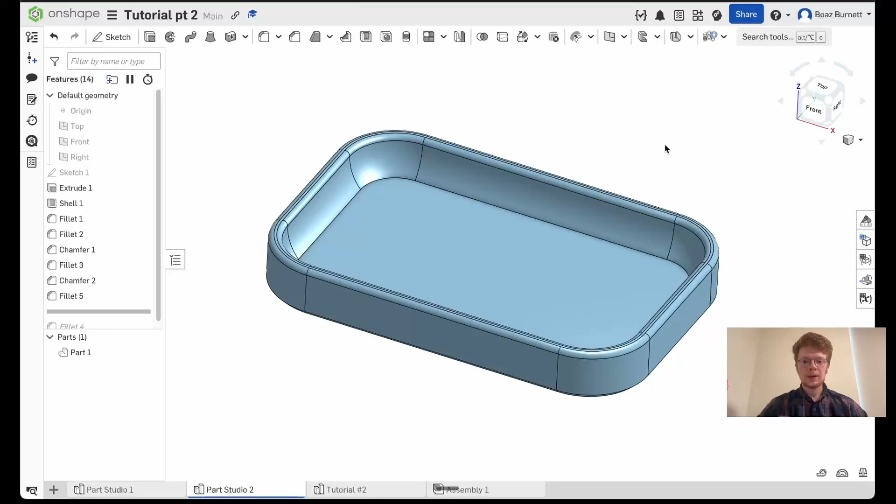Today we're going to be continuing my tutorial series on Onshape, showing you how to create this simple but I'd say nicely designed catch-all tray. To start, go to onshape.com, link in the description, and open up a new part studio. I have it named tutorial number 2, but you can name it whatever you like.

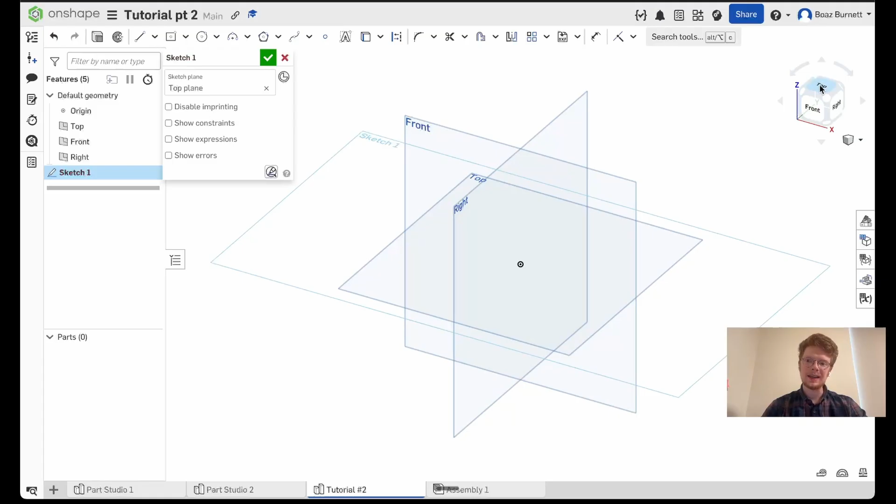Once you're there, just press the sketch button here and select a sketch plane. I'm going to select the top one. Then press the top button in the top right, or press the N key on your keyboard to focus down on it.

What you're going to notice here is that there's an origin point right here in the middle, and it's very important to use this in order to actually define what you're drawing.

For instance, if you have a center point rectangle, which may be hidden underneath this drop-down, and you just draw it out and define one and then two sides, it's going to still have blue lines, meaning it's undefined. If I turn off the dimension tool and drag it, you can see I can still move it around. That's because it's not properly attached to the center point.

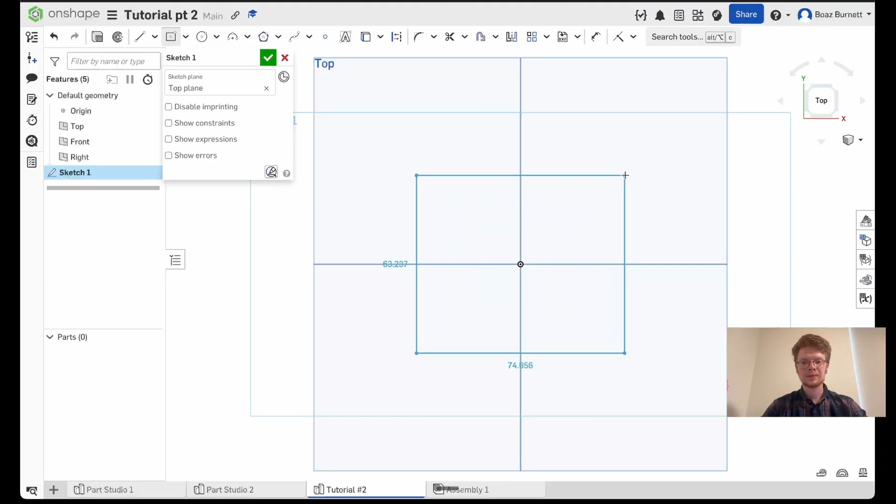But if I delete all of this and create a new center point rectangle based on this center point, once I've defined both the length of the top line and the side line, it's going to have all black lines, meaning it's fully defined, and I can't drag it around. Turning off the dimension tool and trying to drag it, nothing happens because it's fully defined.

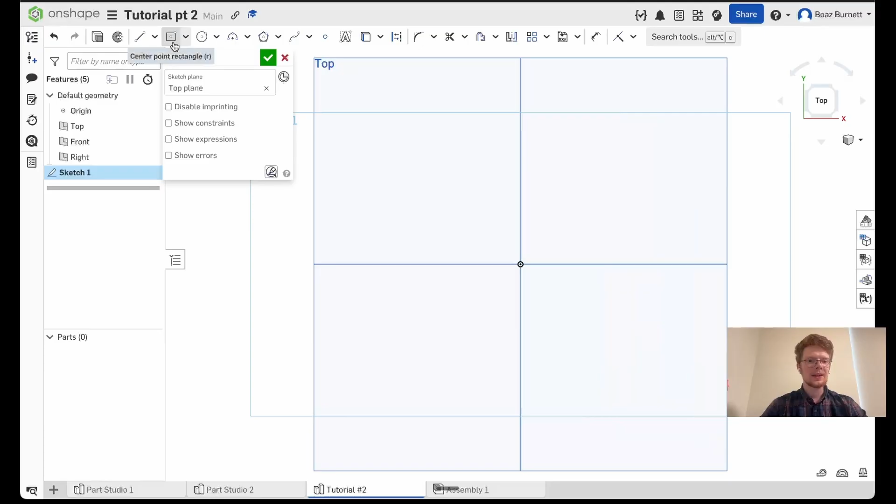With that said, let's get started. I will once again push the center point rectangle button, possibly hidden below this drop-down menu. Click on the origin point, and then drag out.

I'm designing this so that it works on most 3D printers, including the A1 Mini. So I'm going to define it as 6 inches on the long side and 4 inches on the shorter side here on the right. You can go to the dimension tool either by typing the D button, clicking on this button, or searching for it in tools, and then pressing enter. Then I'm going to click first on the top line here.

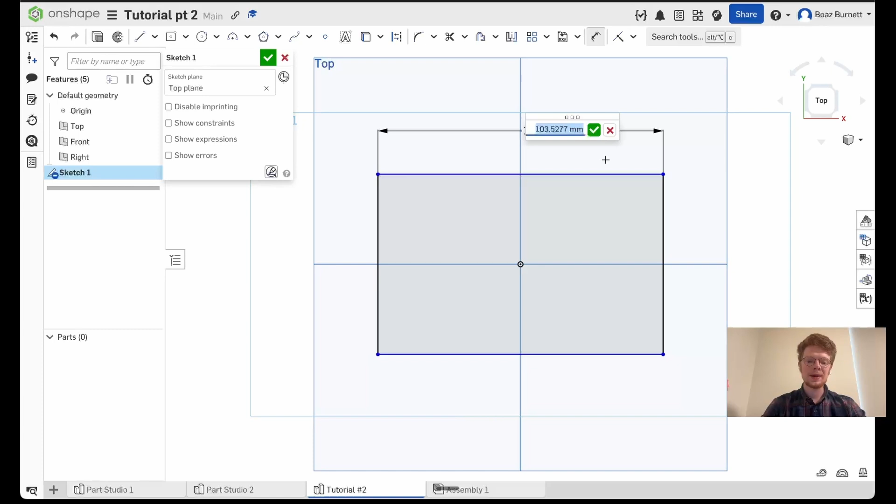Dragging out, you can see that I have my dimensions inside of millimeters currently. But if you click on it, you can still type in 6 and then IN for inches. Pressing enter, it's going to define that as 6 inches.

Mine is showing inside millimeters. Then if you click the right line here and drag out, you should be able to define this as 4 inches by just typing in 4 IN and then pressing enter.

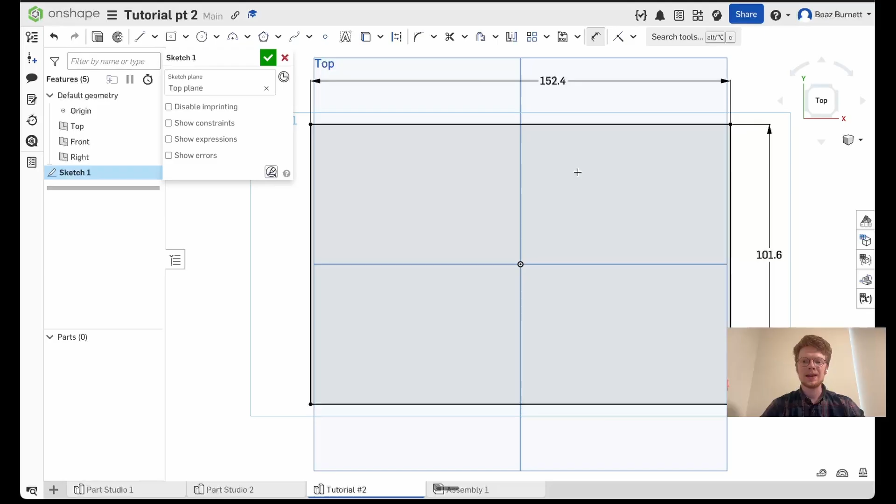With all of that done, the next step is going to be to actually extrude the shape out so it goes from a 2D plane to a 3D object. To do this, we're going to either go to the top left button where it says extrude, or search for it inside the tools menu. I'll click this now, and it should be automatically selected, but if it's not, you can just click on this drawing.

For the distance, I'm going to go with just over 3/4 of an inch, which is 20 millimeters. Type in 20 and then MM to make sure you have the units, and then press enter.

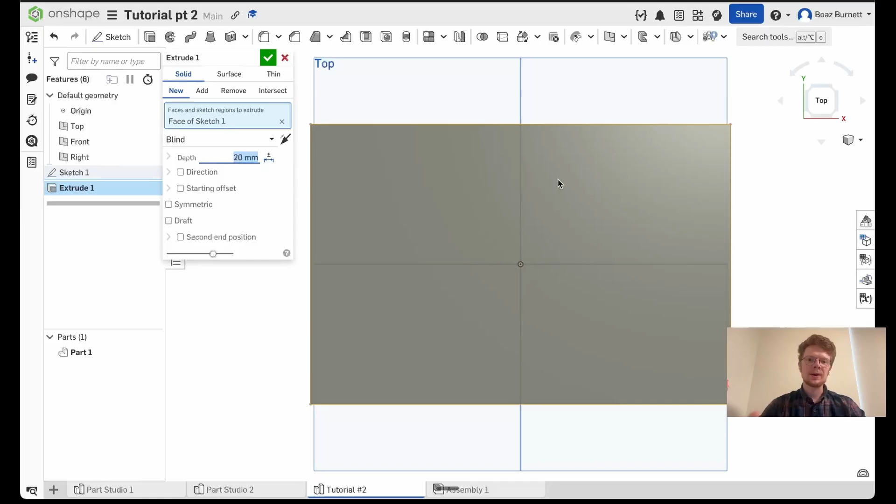Using 2 fingers on my trackpad, or you can use the right click button on your mouse, I can then drag that out to get a preview of how far out this box is going to go. That looks good to me, so I'm going to push the green check mark, and we now have a 3D object.

If you are on a MacBook, you can press the Control key and then 2-finger click or right click button to pan around. Or if you're using a mouse, you can simply press in the middle mouse button, which is generally the scroll wheel, in order to pan the object around your environment.

The next step is going to be actually taking this block and making a hole inside of it so it can hold stuff for us. We did something similar inside of the previous video where we basically extruded a circle and then used a tool to just cut out the space inside of it. But there is a better way that's a little bit faster.

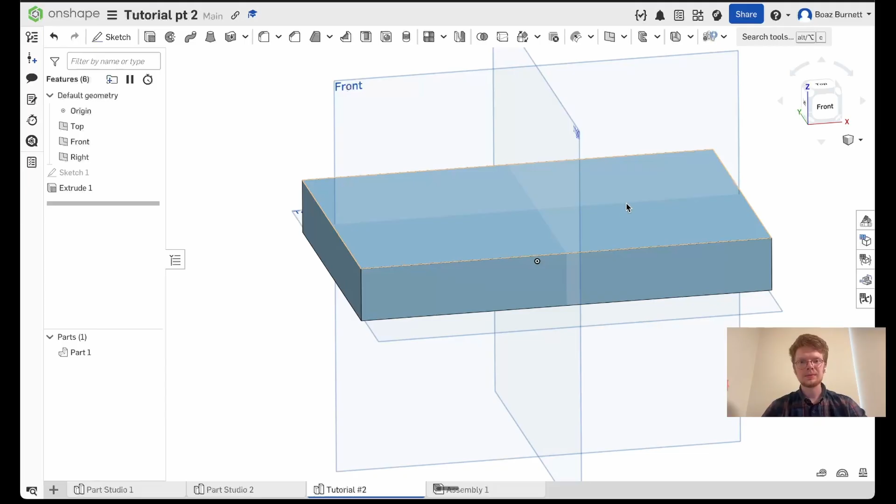It's called the shell tool. You can find it with this icon here inside the top menu bar, or you can just type in shell here on the top left, top right.

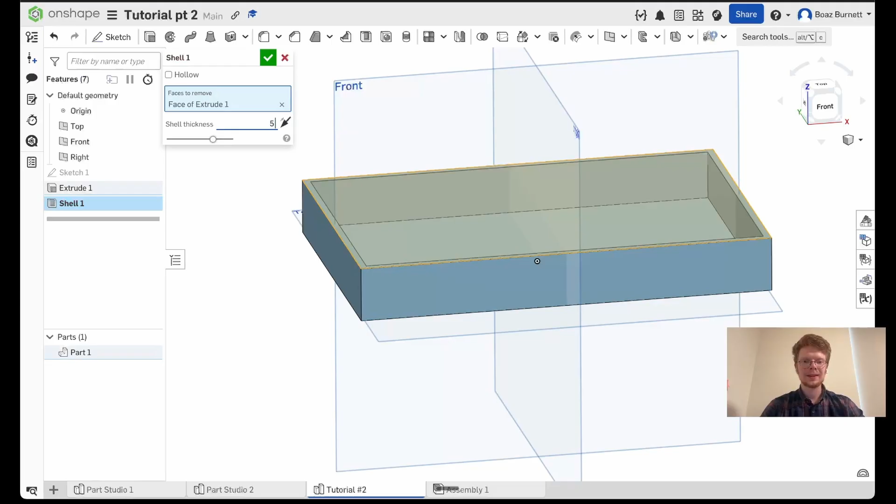Press enter, and it's asking you to choose a face to remove. I'm going to choose this face here. For the shell thickness, I'm going to choose 5 millimeters, so 5 space mm for millimeters. Press enter.

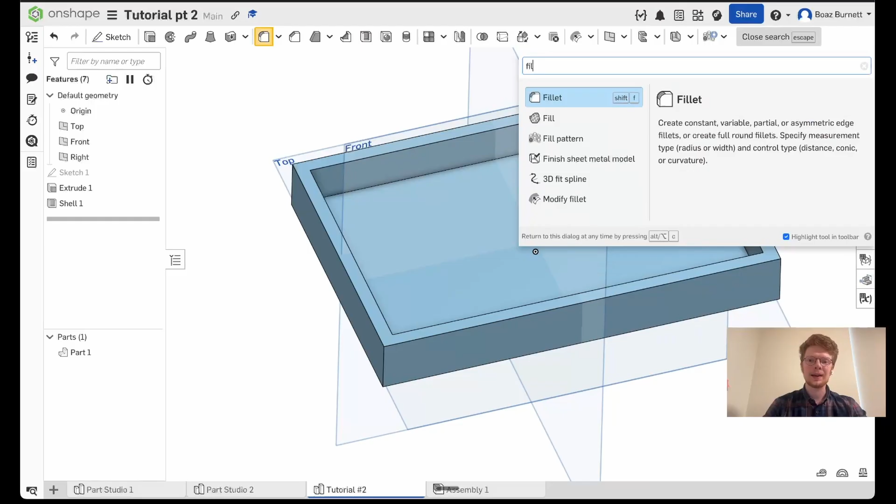Now that you have your box with 5 millimeter walls all the way around, the next step is to get it looking a little more curved, which I think is more pleasant to the eye. To do that, we're going to use a new tool called the Fillet tool. You can use Shift plus F, click here inside the top menu bar, or just type in Fillet, which I'll do now. Pressing enter brings you to this menu on the left, where it's asking you to choose the entities you want to fillet.

We're going to start by curving out this general square shape on the inside, with a radius of 20 millimeters, and the rest of the settings are going to stay the same. To start, I'm going to choose this line right here between the long wall and the short wall on the inside.

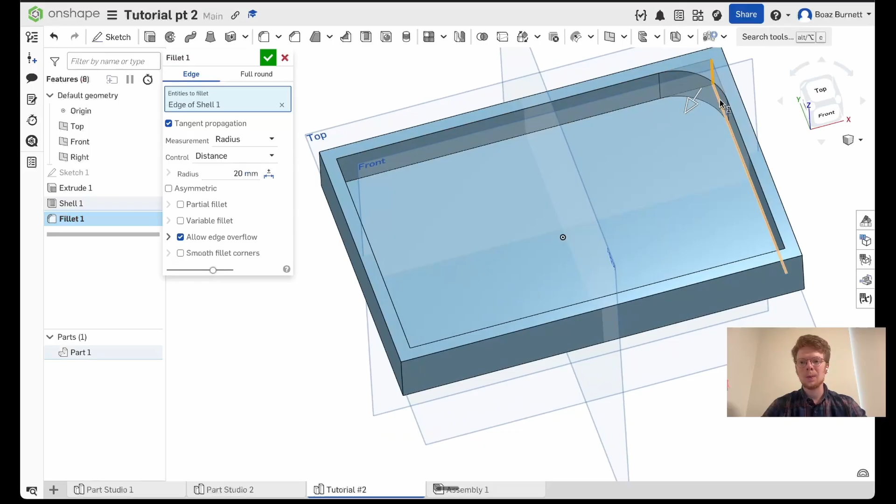As you can see, it previews showing you what the wall is going to look like after applying this fillet, and that looks good to me. So I'm going to go ahead and start selecting the other corner lines on this object.

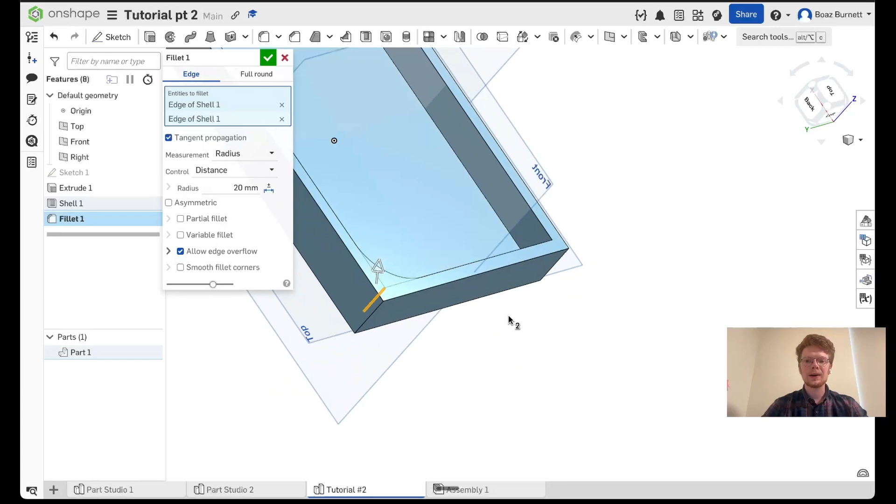Using the right-click button or two fingers on your trackpad, you can rotate the object. I'm going to click this one next, then rotate it all the way around. I'm going to click on this one, pan it over a little bit, and then click on this one here.

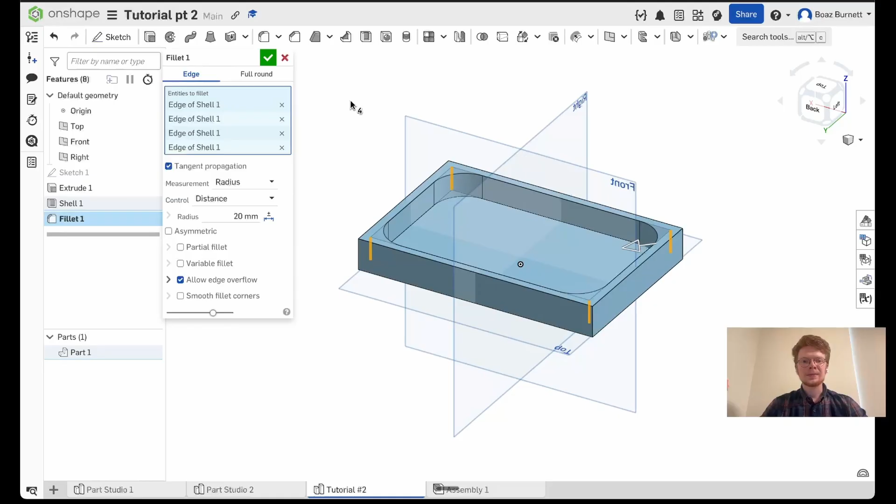If you need to, you can also use the cube here to move your object around, which can make it easier to find some of these edges. You can just click on the corners here to get that view that I'm looking at now. Once you're happy with everything, push the green check mark here, and you're able to move on to the next step, which is rounding out these outside corners right here.

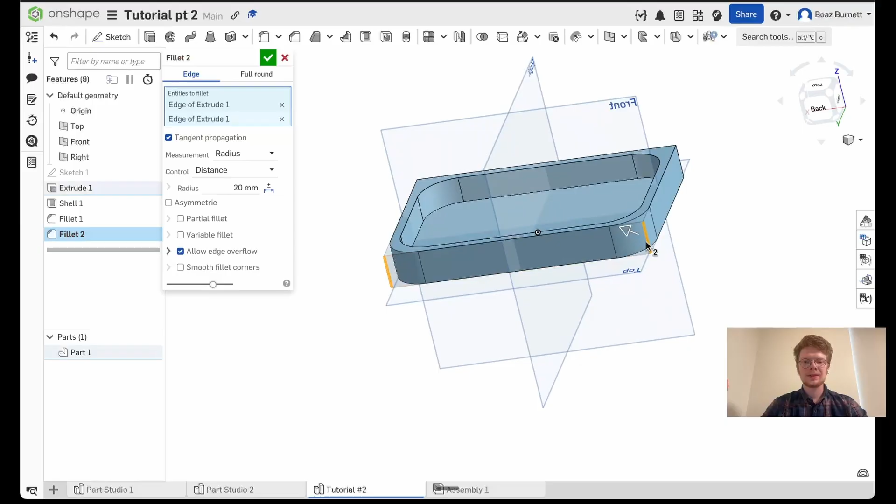To do that, you're going to go back into the fillet tool, and select these outside corner lines. So selecting this here, here, here, and here.

I'm going to take a look at this from the top view, and I'm noticing something I don't really like. The line thickness between this inner wall and the outer wall, and the line thickness between the corner inner wall and corner outer wall, don't really line up. I think it'd be more aesthetically pleasing if it was closer, so I'm going to try changing the radius from 20 millimeters to 25.

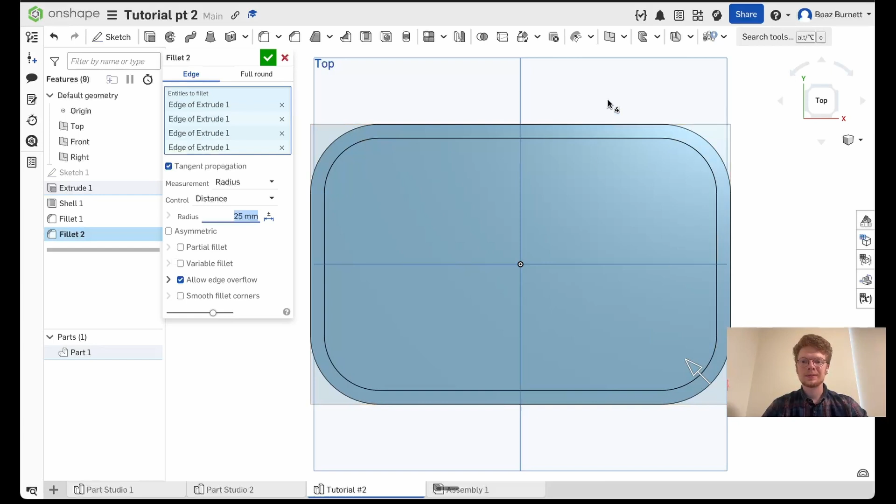Sometimes it's best to press Tab in order to make it actually calculate it. If you press Enter now, that also works. As you can see, the inner corner and the outer corner are now much closer in wall thickness to the rest of the design here, which I like. You can press the green check mark now, and that's really starting to come together.

The next step is applying a new tool called a chamfer. What a chamfer does is it basically takes a 45-degree angle off of the bottom of your part, or wherever you're applying it. I find this useful for a lot of different things, but one of the most useful aspects is that when you're printing an object, you won't have an issue with the first layer kind of squishing out.

If you're using a Bambu Lab machine, I found that they're generally pretty reliable at having a clean first layer. But on older machines, and even sometimes on Bambus depending on how it's tuned, you can still have issues where that first layer sticks out a little bit farther than it should. Using a chamfer on that bottom edge can fix it by bringing those edges in a little bit.

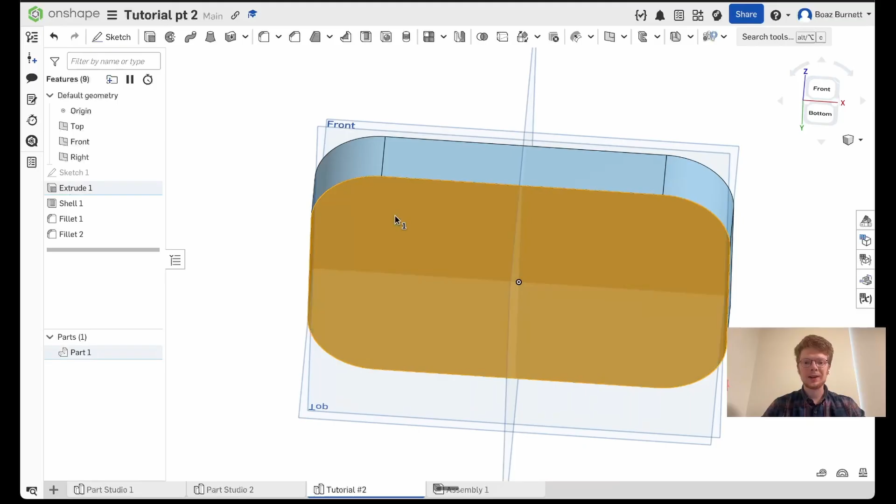We're going to try that now by flipping the object over using two fingers on the trackpad or the right mouse button, and selecting this bottom face. You press the chamfer button, which you can also search for in tools here. As you can see, it defaults to 5 millimeters for that chamfer.

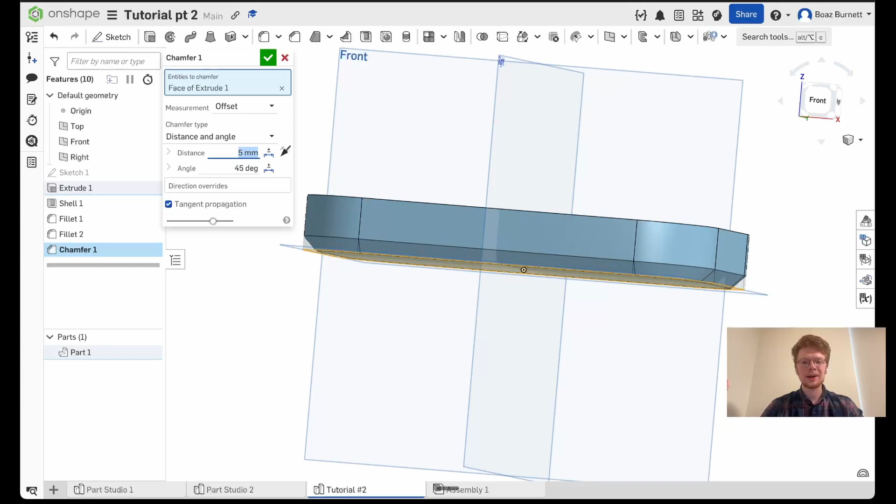I think that looks pretty good, so I'm going to just go ahead and stick with that. But if you want to, you can adjust that down to 2 millimeters or whatever other value. I'm going to leave it at 5 for now, and then push that green check mark here.

So it's starting to look pretty good, but let's look at the inside of this as well. I'm going to apply a chamfer here because it's going to help with the transition between the bottom and the top of this design. It will also help if you throw your keys or something in there, where it's going to kind of settle into the middle, which is generally what I'd want for a catch-all tray.

So what I'm going to do is just click on the chamfer button again, and then start going around the inside of this design. So just click right here.

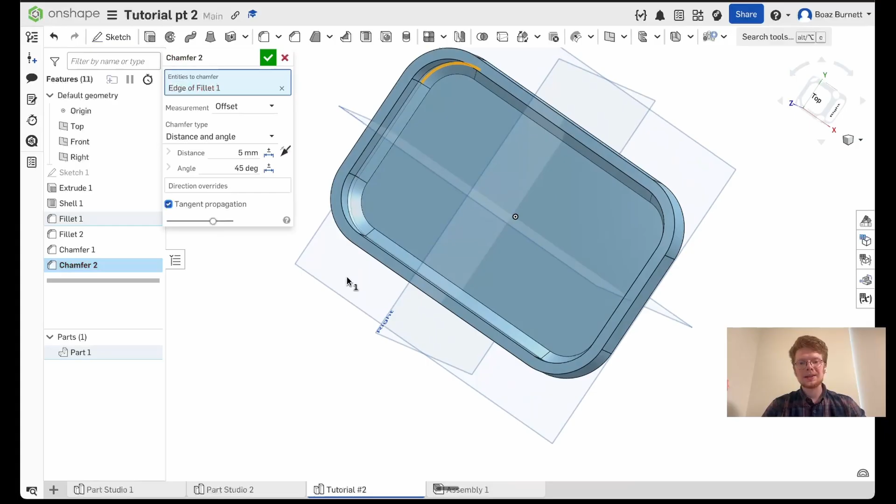With tangent propagation turned on, it goes all the way around from just clicking that one section because it's a continuous circular path. If you turn that off, it will just do that one section - it's actually giving us an error right now. I generally just leave that on, and it works for most use cases. If you're happy with that design, just press the green check mark here. We're starting to get a design that I'm really happy with.

The next step I would do is go and take the fillet tool one last time, selecting the top face here just to round it over. Sometimes on printed objects these edges can be a little sharp, especially if it's an object like this where you're planning on using it semi-regularly - you toss your keys in there, toss your wallet, whatever else when you come in through the door. It can be nice to soften that out just a little bit.

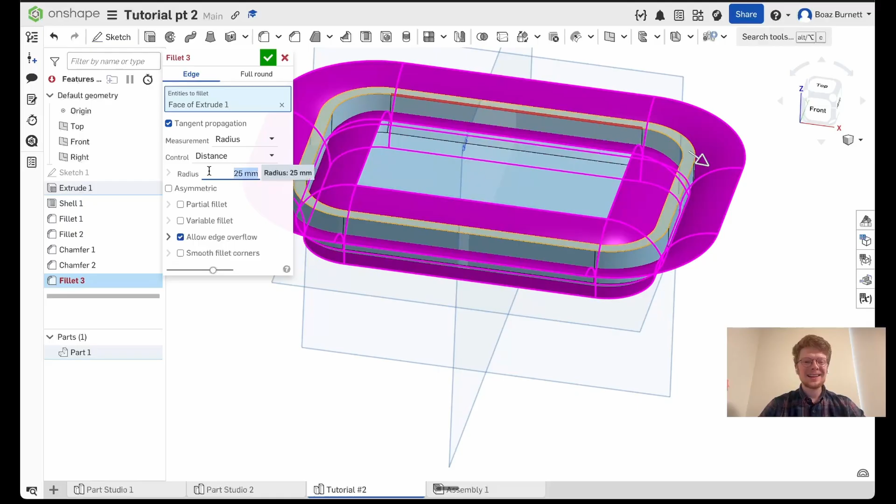I'm going to click on the top face here, and if it's left at 25 millimeters, it's complaining a lot. We're going to cut that down all the way to 2 millimeters and see what that looks like. And that looks pretty good. So we're going to go ahead and leave everything on and press the green check mark.

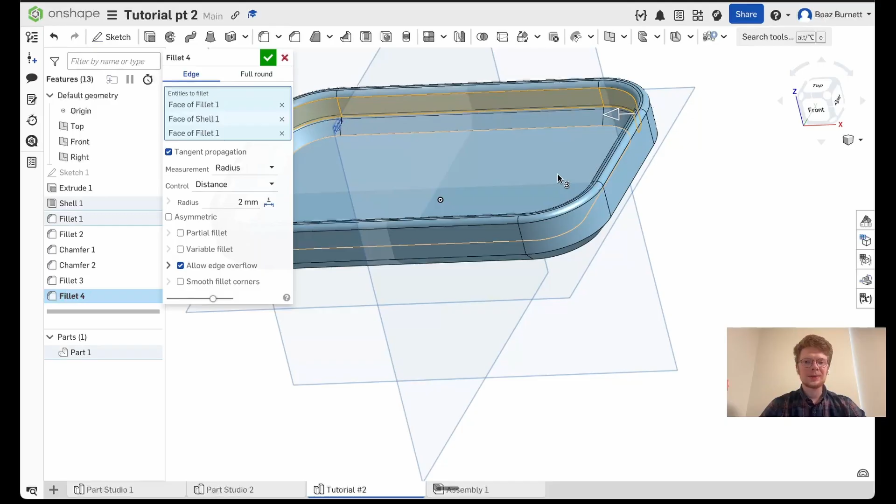So all in all, I think this is just about done, but I want to do one last thing to kind of take it over the edge. That is using the fillet tool one final time, going around all of these edges to bring it out just a little bit. You can rotate using the 2 fingers on trackpad or the right mouse button, and just go around, kind of round this out just a little bit more.

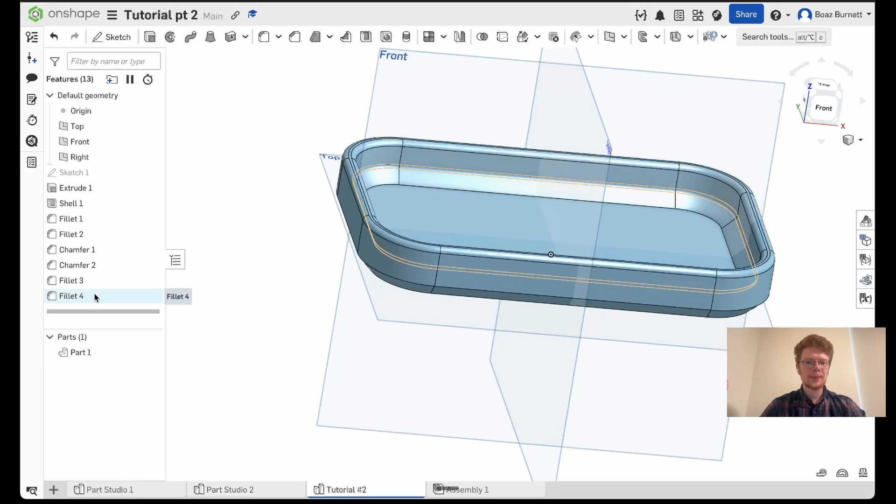Here's what it looks like at 2 millimeters, which I think looks pretty nice. But if you boost it all the way up to 20, I think it looks even better. It's just one continuous, smooth curve going down, with the chamfer ensuring that those first layers aren't going to print in a way that's a little bit less aesthetically pleasing.

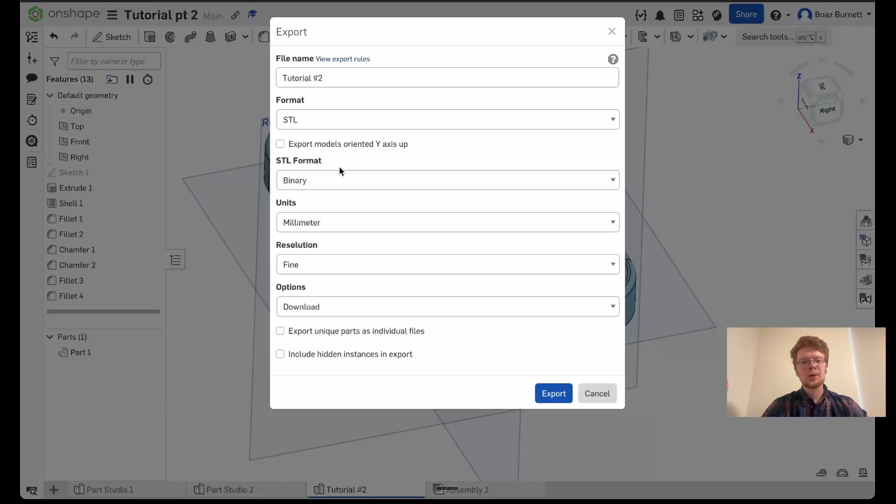If you're happy with that design, all you need to do is go to Tutorial down here at the bottom, right-click on it, 2 fingers on the trackpad, and then press Export. Make sure your format is on binary STL, millimeters, fine resolution, and download. I'm going to call this tutorial 2 dash catch all tray. And then I'm going to press export here.

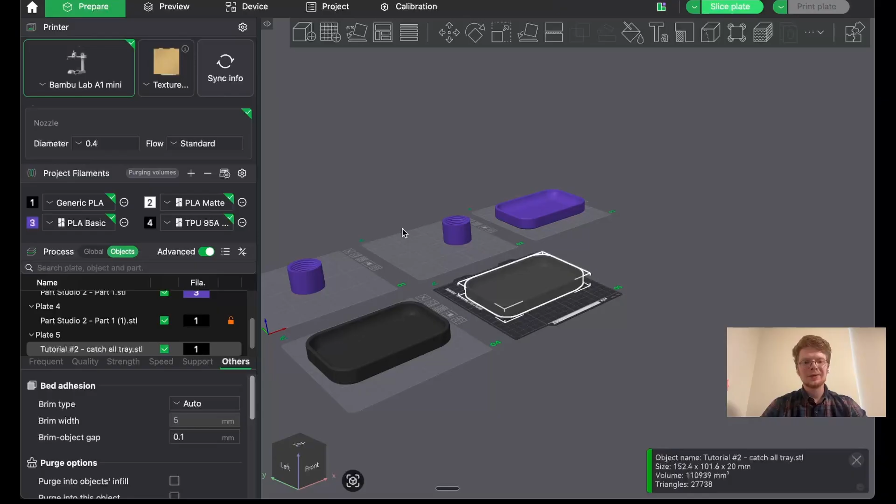Going over to Bambu Studio, you can see that I have an earlier version already in here. But I'm going to go ahead and add in one more plate and then drag that in from downloads. I'll then select my design. I want to see what this looks like inside of purple, so I'm going to select 3 here.

Then I'm going to go ahead and try one last thing. If you go to others on the Bambu Studio slicer software and then scroll down a little bit, you'll see an option for fuzzy skin. By default it's turned off, but if you click on this drop down and change it to all walls, it's going to give you a pretty interesting design that I'll show you in a second that kind of elevates a design like this in my mind.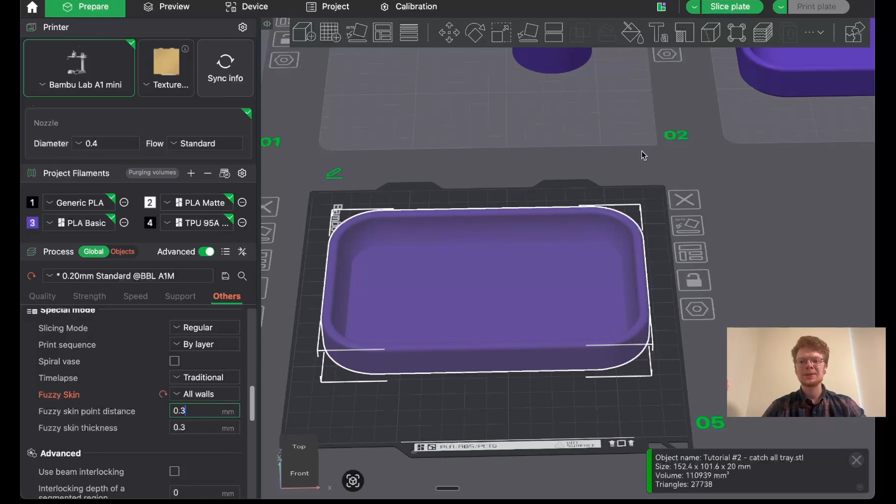I generally like to have the fuzzy skin point distance at 0.3 and the fuzzy skin thickness also at 0.3 millimeters. I just find that's a design that I quite like. But you can choose whatever variables you want there and kind of play around with it. I'll then press slice plate.

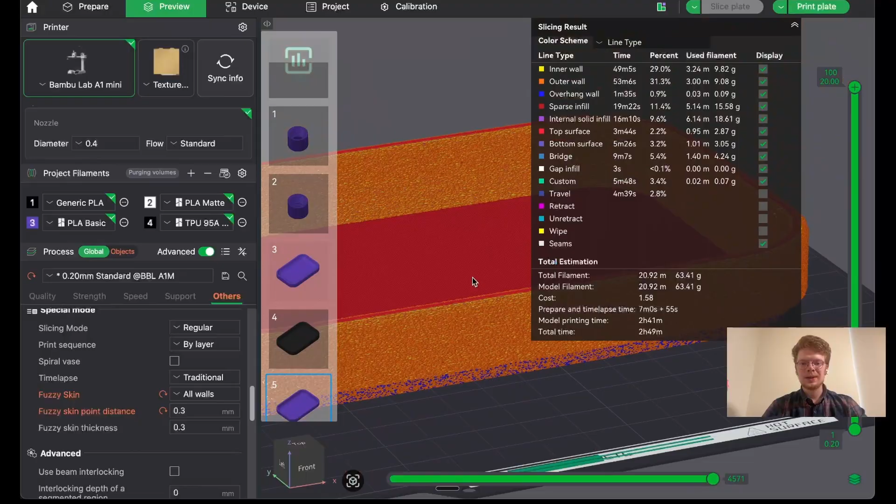And you can see there exactly what I'm talking about. Changing from layer height on the color scheme here to line type, you can see it just a little bit better, where it looks almost like a rocky or marble type design. And I'm pivoting the design right now, just using one finger on the trackpad to kind of go around.